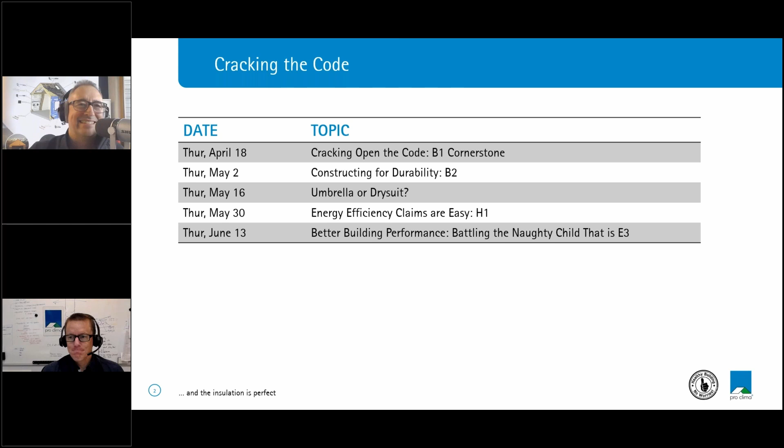Code clause B1 is part of the stability clauses in the New Zealand Building Code. Before we get too far, we need some clarity. Standard NZS 3604 is not the building code, but it's commonly referred to as such.

Hey, apprentice, can you grab the building code from the van? The building code sits under the Building Act, and it has high level objectives with functional and performance requirements. NZS 3604 is an engineering standard for lightweight timber structures - that is one method of meeting the building code.

Clause B1 structure. Okay, with that out of the way, let's get into B1 structure for any building. The objective of B1 is that we need to keep the building standing up in order to protect the people living inside it. The functional requirement is to keep it standing up over time during construction, renovation, and the lifetime of the building. The performance requirement is to keep the building standing up while it has to resist imposed loads.

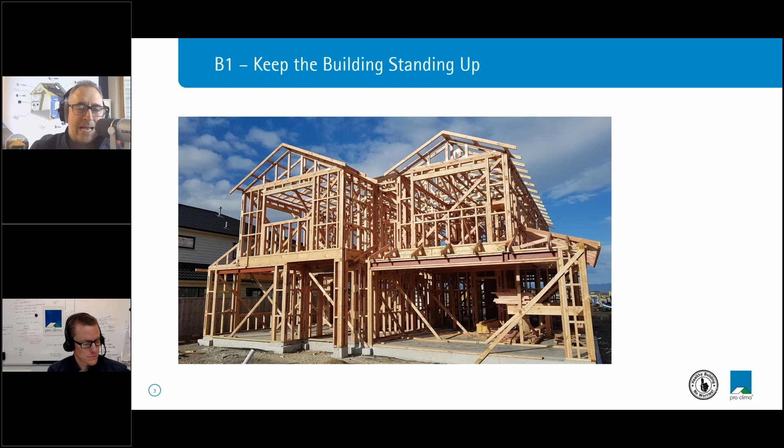These imposed loads are named in a long list of 18 items. They include standing up under its own weight or self-weight, and then harder things like water loads, wind loads, and seismic loads that it needs to resist. And then crazy hard things like fire, impact, and even explosions.

Now, if you're an engineer watching this, you're probably thinking, well, this is not my problem. I'm here today pointing out that these things are all connected. If we mess up E2, external moisture, or E3, internal moisture, we affect B2 durability, and that then becomes a B1 structural problem. So this is what today's webinar series is all about. It's the effect of changing something in one area and the resulting knock-on effect in other areas.

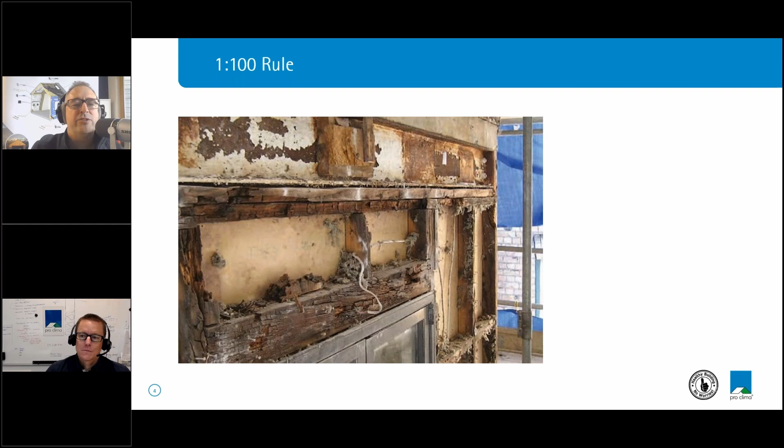Let me give you an example from the design perspective. So we're all being driven towards providing an R6.6 construction value for our roofs with the new H1. So let's imagine what this looks like in a skillion roof. An R6.6 construction value requires deeper framing, somewhere close to 300 millimeters of fluffy insulation. More framing and more insulation means more cost. But it also changes the speed of the vapor movement through the structure.

Taking some time to model the proposed roof thickness will very likely result in a roof thickness built for the climatic conditions and see an energy demand decrease for the building, and not getting carried away with expensive framing we might not require. An internal frame, like I'll show with the wall, has the benefit including air control with an air tightness layer and vapor control, as is finally being openly promoted in BRANZ details.

What we've just connected is B1, B2, E3, and H1 plus the cost. The impact of B1 structure decisions, frame depth, frequency, options of internal or external insulation layers - these have a real effect on heat and moisture movement. So B1 structure affects B2 durability and vice versa. E3 internal moisture affects B2 durability and E3 internal moisture affects H1 energy efficiency.

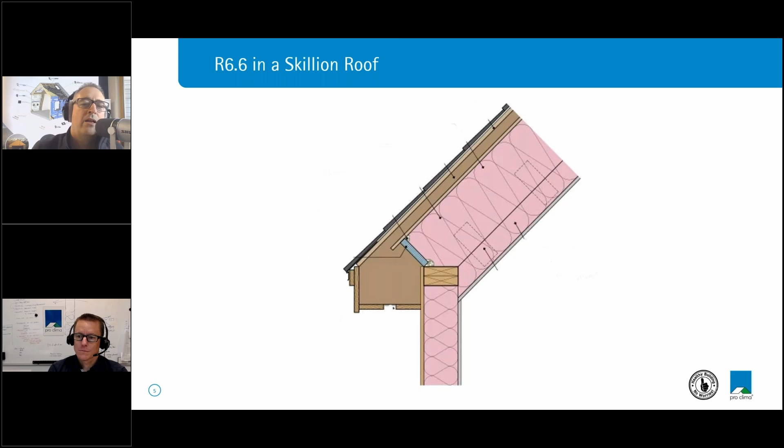So we've seen a lot of insulation in the roof in the previous slide, but what happens in other areas of the building? The engineer must prioritize keeping the building standing up. Otherwise, they get a slap on the hand. So make sure there's lots of timber.

Now, it's long been assumed in calculations that the fraction of timber in a wall is supposed to be between 14 and 18% of the wall in a 90mm stud wall on 600 centers. In their study, Beacon Pathway evaluated 47 new build homes and found that the as-built average was around 34% timber in the wall, with a maximum found at 57% timber in one wall.

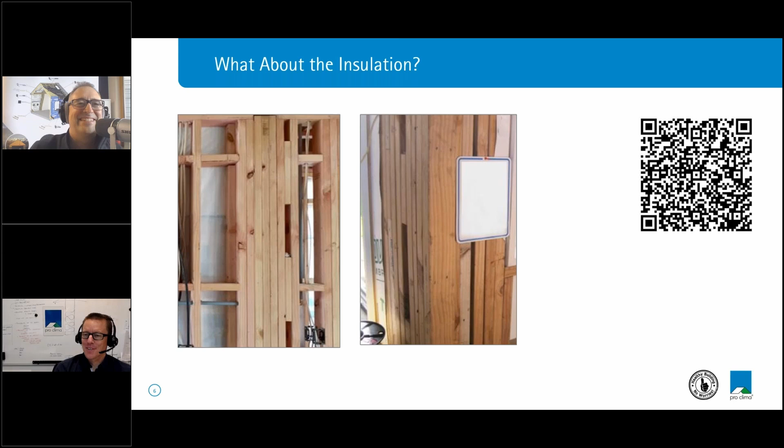So here's another example of where the framing has obviously taken precedence over the insulation. You might want to ask, what good is the insulation when it only fills these tiny squares?

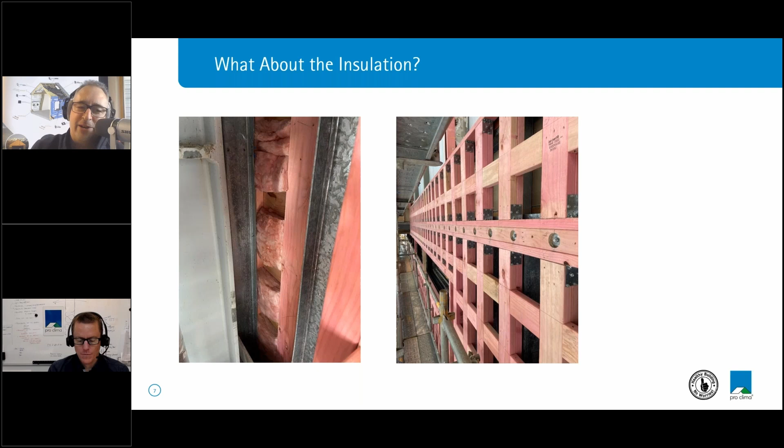Now I'm going to hand back to you, John, for the first poll of our webinar today. This is a really tough one, well, kind of tough, it's a bit of fun really. The question we're asking you is quite straightforward, you click on the box and submit your answer. So the question is, are Nogs or Dwangs, if you're in the South Island, required as written in NZS 3604 2011? Easy, short answers: yes, no, I think so, and finally, I thought so up until now.

Make your selection on that, and as we do, we're going to invite our panel to jump in. Catherine and Richard are going to join us to answer this question and give us a bit of clarity. Okay, so that means we've got over 60% of the votes already in. No, I love it that 58% of people have no on there, and I love the final two. Thank you for those who have questioned your thinking right now. I'll leave it up to the panel to give us a clear answer.

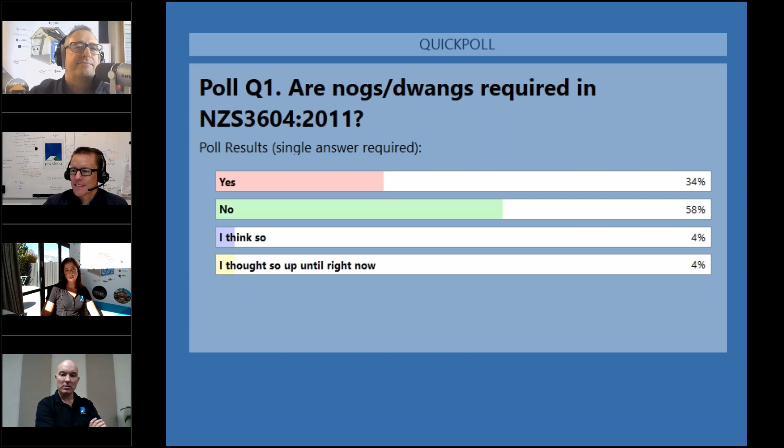That's interesting, what was it? 58%, sorry, it just disappeared there. 58% say that nogs aren't required, so you'd assume around 58% of timber frame buildings don't have nogs. If the designer doesn't think they're needed, they probably aren't putting them in. But we still are seeing most timber frame buildings with nogs. I wonder if it's the builders or architects answering that. It's all anonymous, but yeah, exactly.

There have been numerous reports and studies done over the years. Sean from Oculus did a great article a while back, 2019 I think, listing all the different studies done from the 1990s onwards, I think there's 4 or 5 of them. Maybe we need another 4 or 5 studies just to prove the studies are correct, but yeah, to show that you don't need nogs. Sean was pointing out there are 2 ways of complying with structural requirements, and your cladding can be used basically to keep the timber straight, which is great. And with the advent of kiln dried timber, it doesn't twist and turn like the old timber used to. Anything to add to that, Kat?

Yeah, I guess there are other forms of bracing that don't require dwangs, but that's talking to your engineers, and just having the option of not having them in there will greatly improve the performance of the wall, because we do need thicker walls really with insulation. As soon as you start putting more and more timber in there, you lose that R value, like Simon was saying.

We have the QR code on screen there, everyone. If you want to scan that, it'll give you access to the document Richard was talking about from Oculus Engineering, Sean McIsaac. Feel free, get your phone out and scan that code. And if you want the short version, the answer is actually no, nogs are not required, and you can read that in NZS 3604 in section 8.5.4.

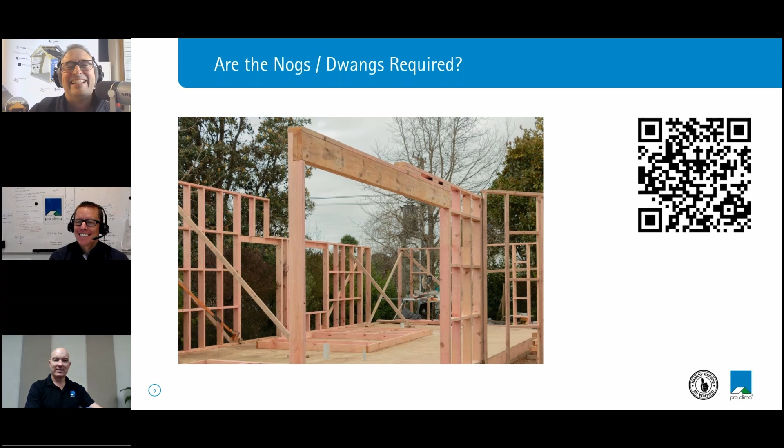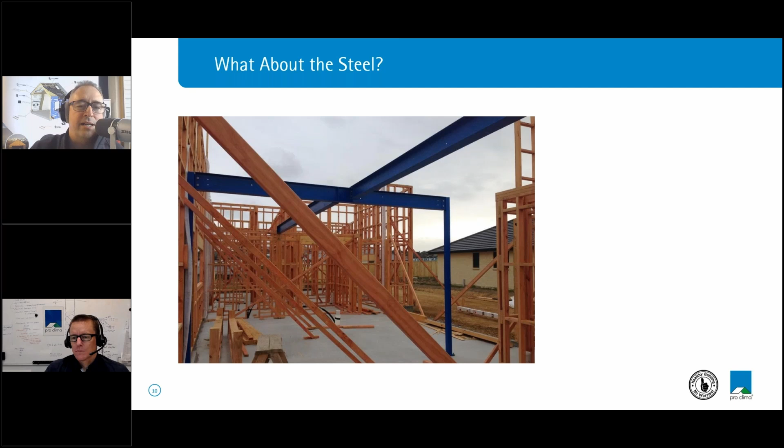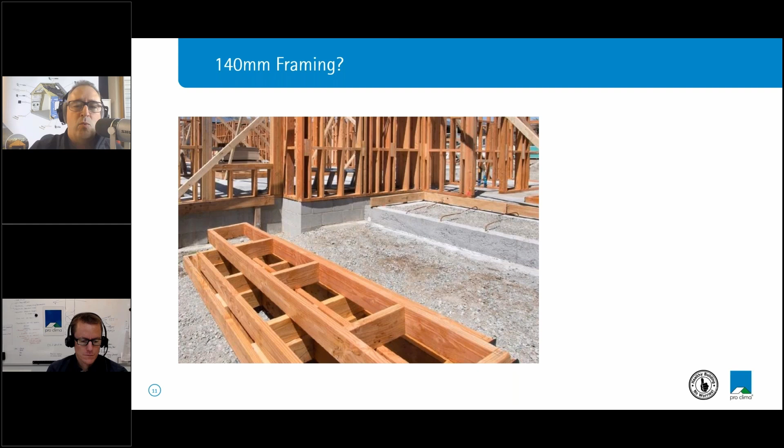Now, with the increase of insulation values in the ceiling, we can probably expect some more increases along the way, and it's likely to be the walls considered next. We expect that the NZS 3604 update within the next 12 months will likely default to 140mm framing for the space it creates for insulation. The FTMA feedback, when we were there earlier in the week, was that this will add significantly more cost as well as more for transport and manual handling. So 140 framing is 30% heavier than your 90mm timber stud.

Now, if you look at this picture, when you can see the stud line on the inside, it probably means we can expect mold in that construction. Now why is that? Lack of heating, probably lack of ventilation. Timber frame is colder than the plasterboard, so that's where condensation occurs first, along with mold growth later. I would argue that changing from a 90mm frame to 140mm frame is unlikely to make a difference in this scenario. Why, you may ask? None of the conditions are changing. The insulation isn't a heater.

Why is this important? Because the promises from MBIE were that these changes will deliver warmer, drier, and healthier buildings. What were those changes? Increase in the number of climate zones, increase in the insulation requirements. Too big a promise, I think. Back to you for another poll, John.

All right, that's a really interesting thing to look at, that last slide, just realizing that the change in depth in the frame can't actually change the conditions, right? So you have 90mm of insulation in there or 140 — if you don't heat, if you don't ventilate, the outcome will be the same, or same or similar maybe. So there are some good challenges ahead with that.

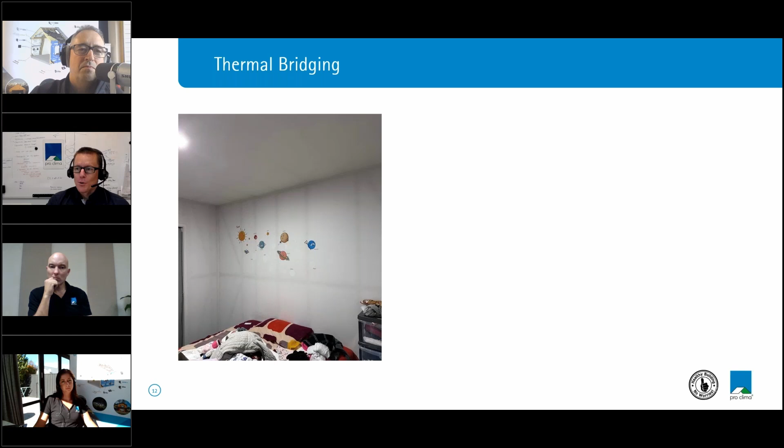Okay, so the poll question we have, again, this is a bit of a fun one, a bit of a dig at some of the things that we do. So what is the dumbest thing we do? Answer one, too much timber in the wall — we've covered a bit of that already. Second, is it a lack of ventilation? Is it a lack of insulation? Now that might be a combination of the first one, too much timber and not enough space for insulation, or it could just be a lack of insulation. Or finally, is there too much insulation? Is that the dumbest thing we've decided to do for our buildings? So that poll is open, and remember, you need to submit your answer.

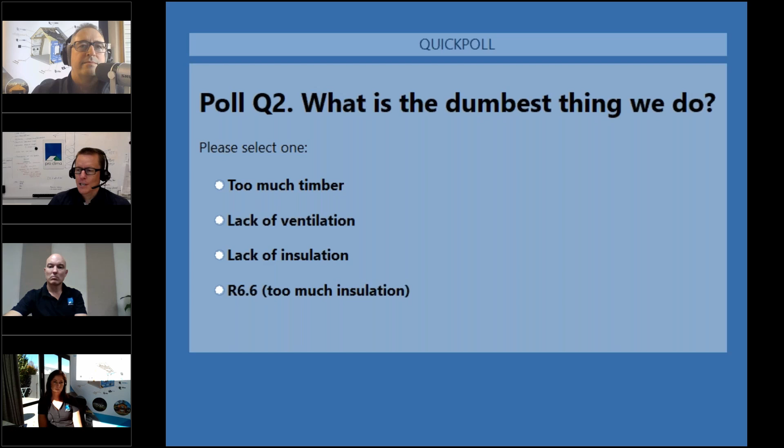And how are we going on that? So 70% voted, 71, that should do. Let's kick on. Right, team. Oh, stop — lack of ventilation. Lack of ventilation, love it. All right, I'll leave it up to you guys to discuss.

What do you reckon, Catherine? What do I reckon? I reckon there should be like a fifth option.

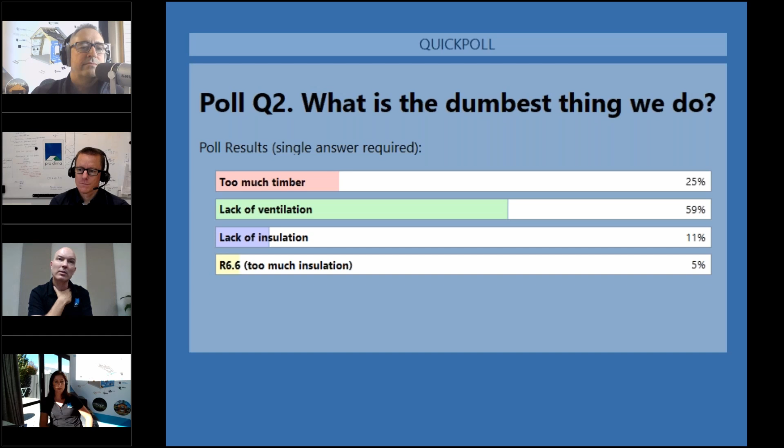The lack of ventilation, we're not going to cover that in our series, but it's definitely going to be referred to G4 throughout all our presentations. Lack of ventilation is definitely a dumb thing to do or not do. We're generally talking to people looking to make their building more energy efficient, increase insulation, make it more airtight so you don't lose as much energy outside. But ventilation systems aren't really being designed in as much, with reliance on windows for ventilation, while it's in the code. The code actually says you need a certain number of air changes even in your living spaces, so you can't reliably get that just relying on windows. So I think lack of ventilation is probably the big one - improving the ventilation requirements, making systems more mandatory. Ventilation systems might be the next thing they look at.

In terms of our R6.6 and the roof as well - do you really need that much when you're just stacking a beanie upon a beanie upon a beanie on your head? So going from the schedule method to the modeling method and figuring out where to put the right components, you may need less in your roof, and you may gain more in your building when you put better windows in. The windows are always the weakest link - even the best insulated window with a thermal resistance of about R1 is still far less insulated technically than a sort of okay wall. So improving your windows is going to have a massive effect, and using ECCHO or PHPP for your thermal modelling can show that you're meeting the energy requirements, energy targets. So having really less, and more for less.

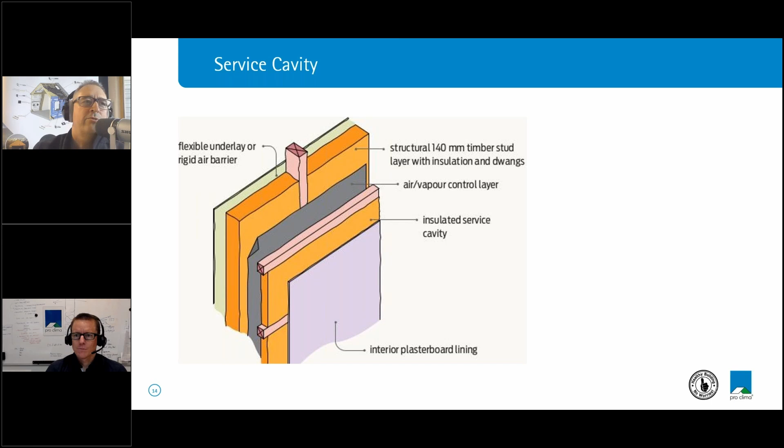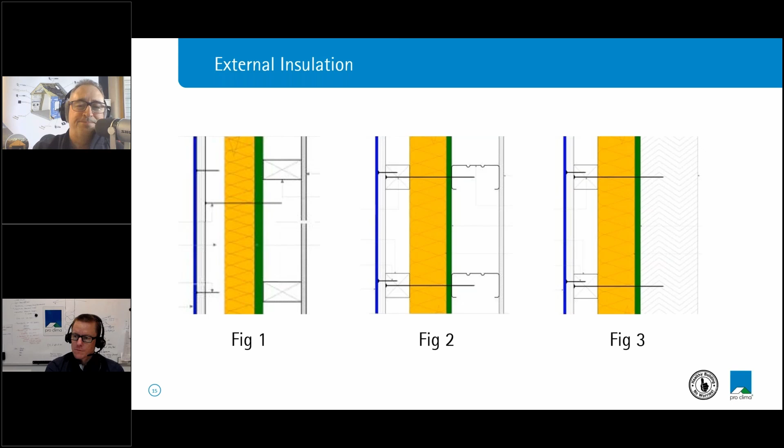So things are not all perfect yet. There are still some challenges that we need to work out. For example, if we have a look at slab edge insulation, with the new H1 requirements, we're expecting to see some form of insulation installed on the edge of the slab. Now, when you've got the insulation on the edge of the slab, you want to try and line that up with the insulation in the wall. So this means moving the bottom plate out over the edge of the insulation. And this can affect the hold down bolts because they're now going to move towards the outer edge of the slab.

So we need to consider these type of details. We know that Winstone Wallboards are currently working on looking at these sort of details to try and incorporate high performance details into what they're doing.

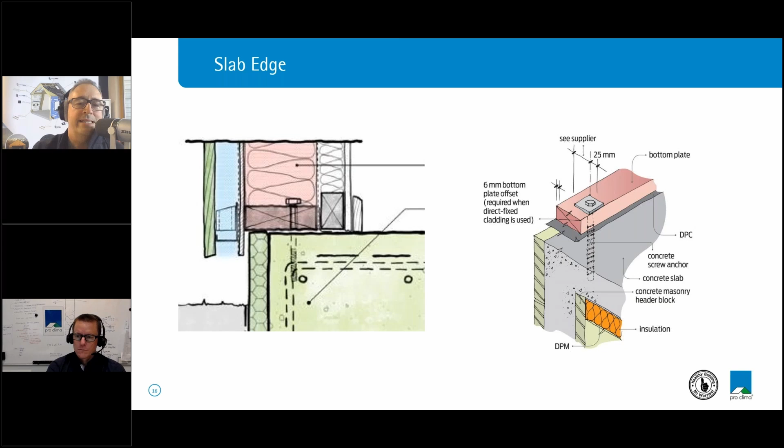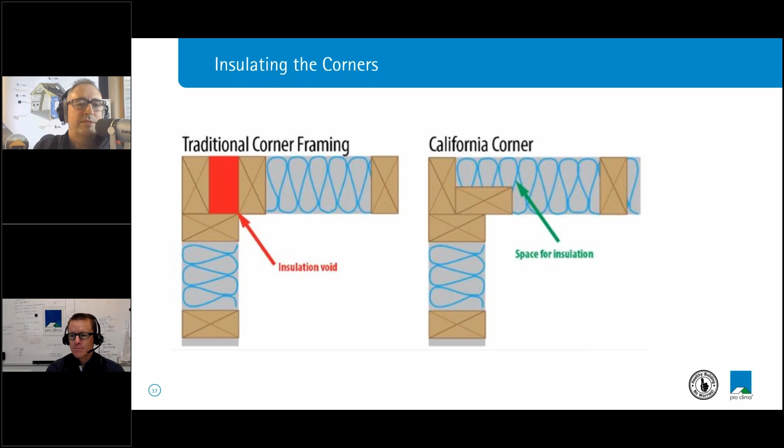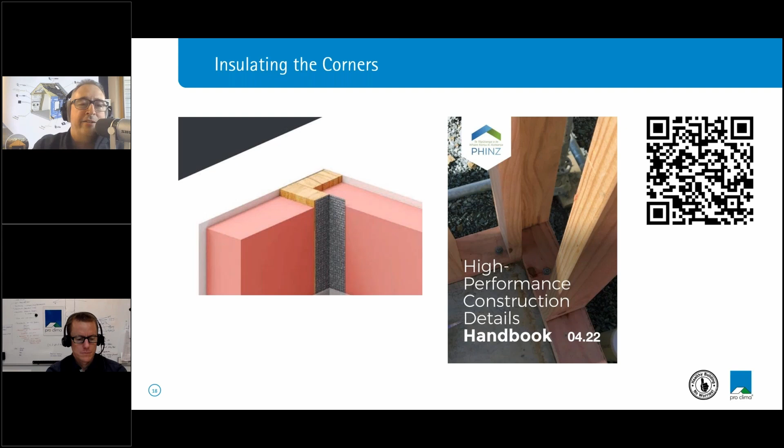But just to point out, Pro Clima are really strong advocates of the German Certified Passive House Performance Standard, which is a really great option. But you can apply the suggestions we're talking about today to every build in order to improve all of your buildings and give us all better homes to live in at the end of the day.

Now, coming towards the end of this presentation, bathrooms are really where everything comes together. We're piping water into our buildings, turning it into steam, and the structure of the building happens to have the lowest temperatures, as we've shown. And this is where condensation will form.

This is already moving into the final part of the seminar series, E3 for internal moisture. The key today is to recognize the issues showing in the image in the middle.

In the bathroom, we create high levels of humidity. The image shown is from a house in Cheltenham Beach on the North Shore of Auckland. Here we've got nogs that may have been added for tapware. We may also have in-wall systems, nogs for cabinets, cables, etc., and not much space for putting insulation. And in this case, it's been really poorly installed, or perhaps the electrician was to blame for relocating the insulation.

But getting back to the summary, the structure needs to be there. So that's B1 structure sorted. But the effects of internal and external moisture due to the design and materials, or lack thereof, triggers effects on durability. That's clause B2, which brings us back to the original question of stability and B1 structure.

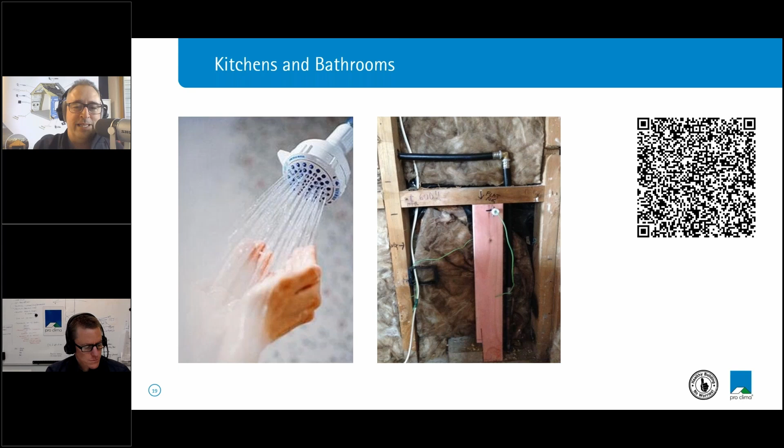Internal service cavities will help keep the services out of the bulk insulation in the main wall framing. Secondly, by putting all the insulation on the outside might just result in an even better building. So have a look at that QR code.

I'd like to finish off by pointing out that if you're an engineer on the webinar, you'll likely use a simulation tool for structural analysis and planning. The beauty of simulation is being able to optimize the structure, not maximize it. Likewise, none of these things we've just discussed needs to be guesswork.

John, back to you. Great stuff.

All right. Thanks, Simon. Hey, we've got some great questions coming. Let's start with one of the hardest ones. Simon, this is going to be aimed at you or Richard or Catherine, so we'll see how we get on. So the question that's come in that I'd like to start with is, what happens if we have external RAB or an external sheathing layer with no internal vapor control?

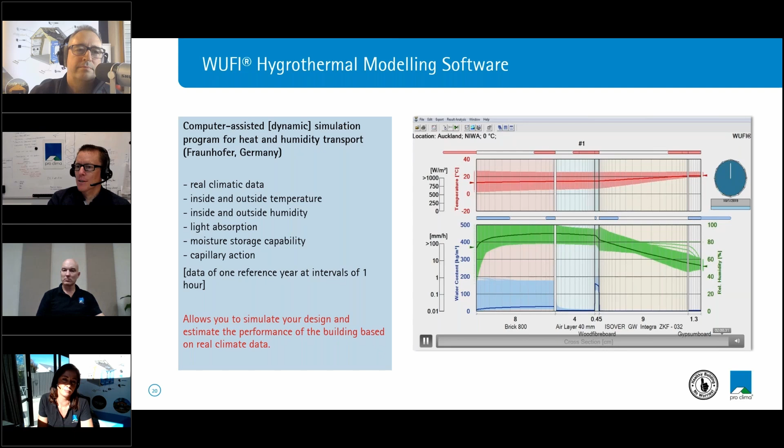I'll summarize it. It's actually in Simon's last statement, which was around the simulation at design stage being cheaper than building it and then finding out that it is high risk, didn't work, or is in the realm of failure. So the simulation - I think maybe Catherine, you could talk about where people would go for that, because that's not us, we're not the rule makers on that. Maybe you could just make comment around WUFI, the simulation software itself.

Well, we do have a lot of people that we've trained in WUFI. We actually have WUFI trainings. Jesse takes those from Australia, and all our WUFI operators are on our website. So if you just go over to there - and it's also quite important to get a third-party operator, I feel, because WUFI can be kind of a little bit manipulated to the better outcome. So it's quite often good to get another party to do that.

And also, I just want to add, having no internal vapor control layer, or having that on the outside - like the RAB board or any external RAB - has always been an air tightness layer on the cold side. So what we're wanting to do is put that vapor control layer on the inside, on the warm side. There's been some issues around warm air reaching that cold air barrier on the outside.

Simon, I'll fire the last question at you around this then. We talk about an air and vapor control layer. We do have one of those products, but what are the other options in the market? Because we don't have the only one.

Certainly, there's a number of options now, John. We see many different manufacturers, obviously in Europe, providing a number of solutions, and as well you could literally use something like plywood with the taped joints, ensuring that you've got a continuous layer on the inside of the insulation, similar to what BRANZ showed in their skillion roof design in Build magazine last month. Plywood can certainly be used as an air tightness layer, but there are other manufacturers as well bringing out products. So we're starting to see this category growing as there's a lot more interest in ensuring the performance of our structures.

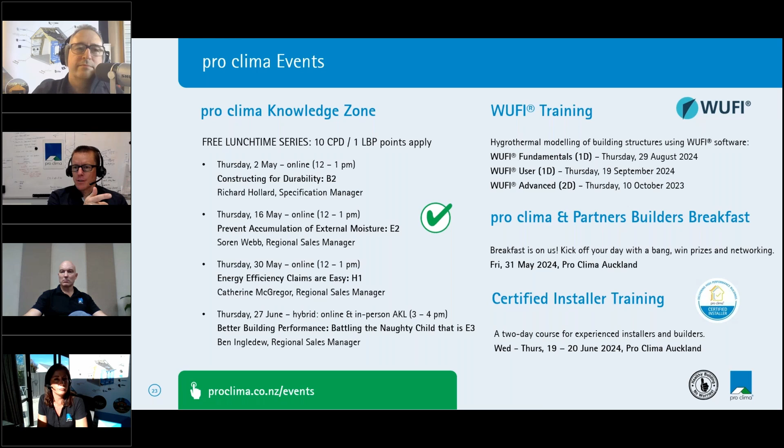So it's really interesting, that question - it's a really important one. The result of poor moisture control, what we're arguing, is that it will affect insulation - we're coming to that in a few weeks - but it will then affect the B2 durability of our structure. We're coming to that in two weeks with Richard Hollard, who's going to present. But then that in turn affects the B1 structure, the meeting of requirements to keep a building standing up for an adequate period of time. So that's why that question is obviously relevant and useful.

So let's go to a different question, quite a different one. The combined 90 by 45 R value - if we do the 90 mil frame and add up the R value in the 90 mil frame with the service cavity to the inside, if we just stick with 90 plus 45, what's our outcome of an R value in that wall? Maybe it's easier not to attempt a construction R value, because we'd have to do some pretty tricky calculations to take into account the stud and batten performance. But if we just look at the R value spacing there, what is that?

I guess so, John. Carry on, Kath. Everybody wants to answer. Great, Catherine. Okay, I was first.